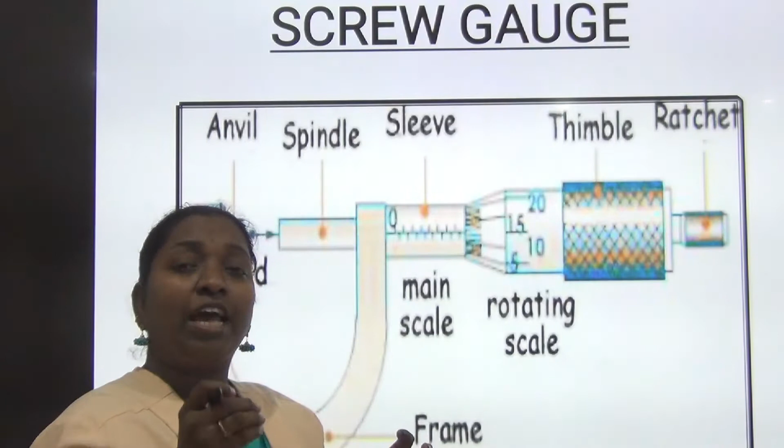In continuation of this, we are going to learn the next topic: the screw gauge. This is an instrument used to measure small dimensions. Like last class we learned about the vernier caliper, using which we can measure the length of an object up to 0.1 millimeter or 0.01 centimeter. The same way, this screw gauge is also a small instrument which we use to measure a dimension of any object, especially the diameter of a thin wire or the thickness of a thin plate.

You know what a thin wire means. In a cable wire, after removing the insulated part, you can see the metal wire. That metal wire's diameter is easy to find and measure with the help of this screw gauge.

So let me read the content along with you. I'd like to describe what this screw gauge is. I told you it is used to measure the diameter of a thin wire or the thickness of a thin plate. So how is it described? Description of screw gauge: the screw gauge consists of a U-shaped metallic frame.

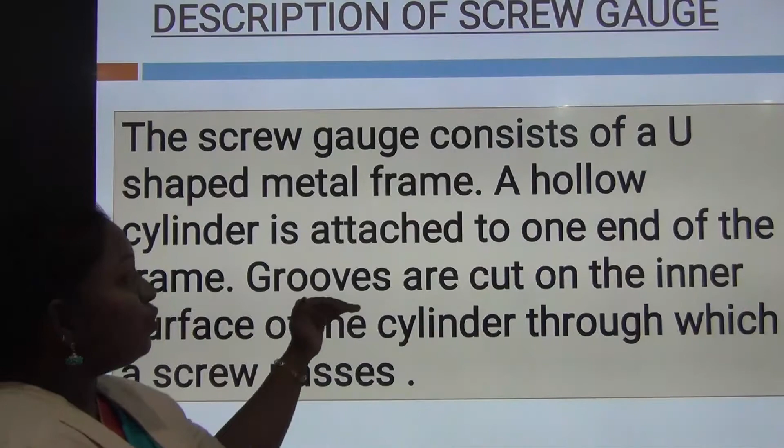A hollow cylinder is attached to one end of the frame. Grooves are cut on the inner surface of the cylinder through which a screw passes. So with this note, let me explain with the picture. First I'll explain with the picture, then we'll read the content, children.

So what letter can you see here? It's representing the letter U, isn't it? U, made with metal, so it is called U-shaped. The metal U-shaped metallic frame.

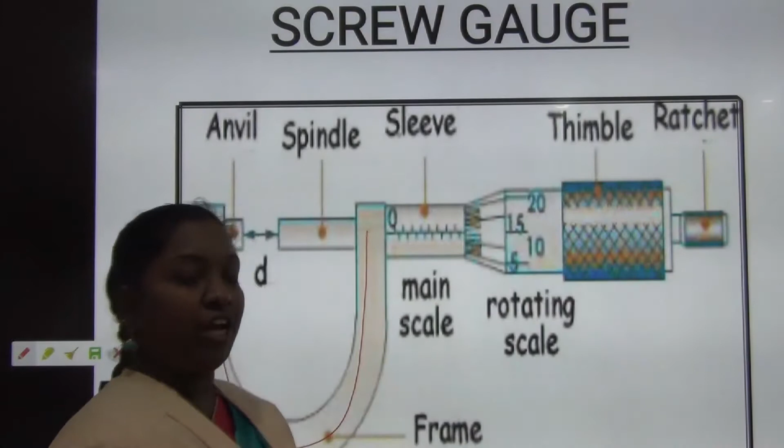See these two frames. Inside, a groove is cut through which a screw passes. Along with that you can see the sleeve, it's a barrel, fixed along with the screw. This sleeve contains a graduation on it, some scale is present on this. This is called the pitch scale.

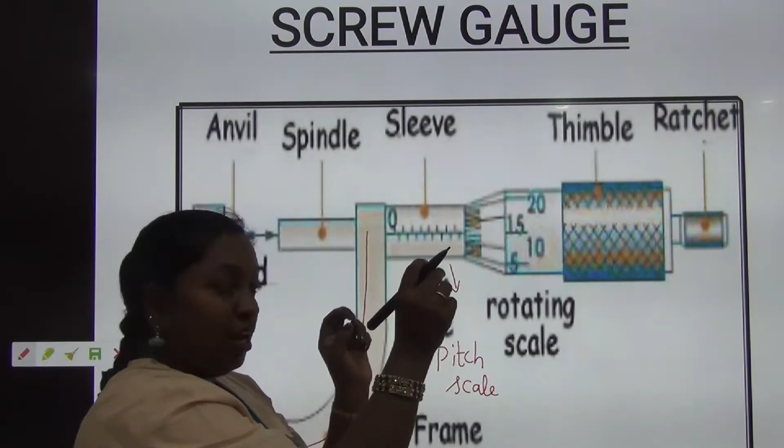Listen children, U-shaped metallic frame, on both sides. On one side, inside the groove is cut so that if you want to insert a screw, a hole is made through that, and the screw passes through. The same way, a hole is cut and a screw passed inside it. Along with that, a sleeve is fixed on it. The sleeve has a scale of graduation. That scale is called the pitch scale. It's okay, the scale is represented in millimeter form.

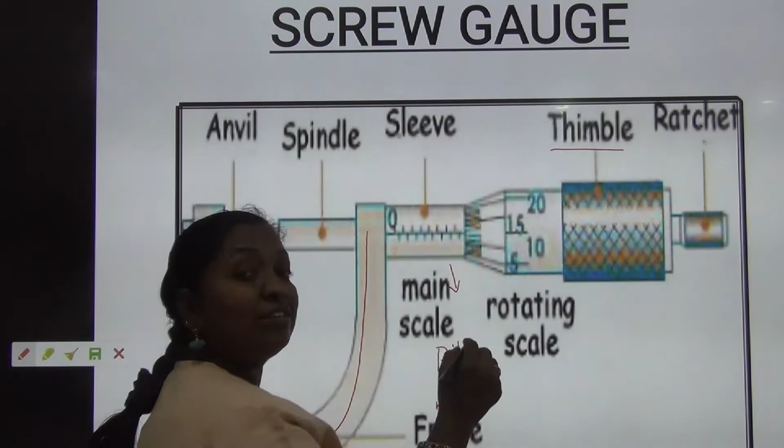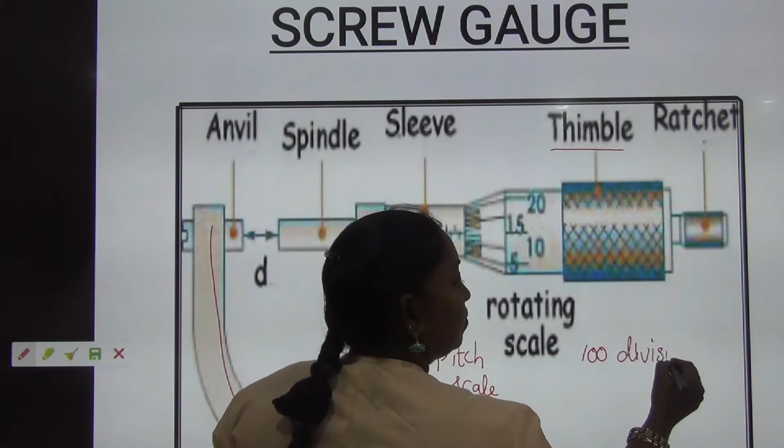This sleeve, one end of it is attached to the hollow cylinder, which is called the thimble. This thimble also contains graduations, but not in millimeter or centimeter. It contains a graduation of 100 divisions, present on this hollow cylinder. So this scale is called the head scale.

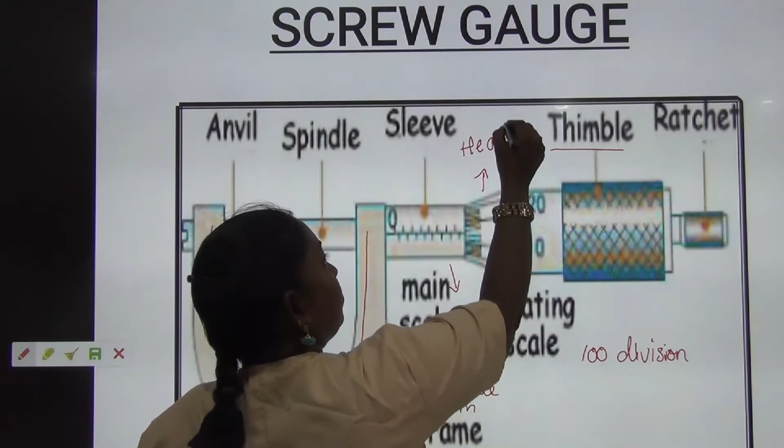Understood children? Pitch scale, head scale. See, most important in this device: it can be rotated with the help of this ratchet. This ratchet is used in the screw gauge. Why? Because it is called a safety device. Why is it a safety device? It is called a safety device.

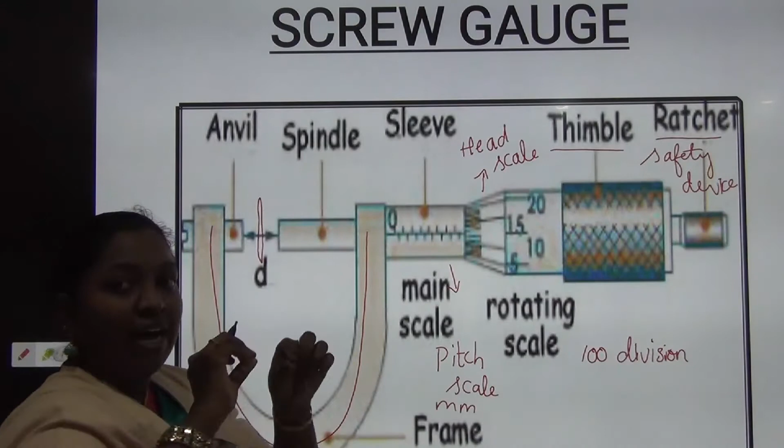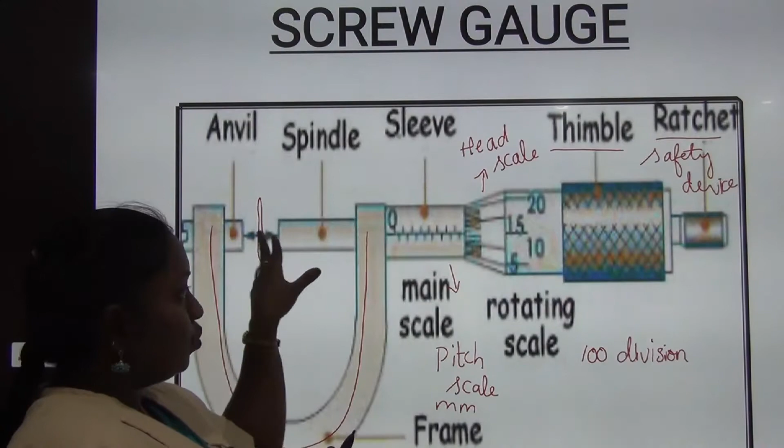After seeing the object which we are going to measure, we keep it between these two studs, in this gap. So if I keep the object there, until the thickness is reached you can rotate with the help of the screw. When you keep rotating and the object gets in contact between the screws, you should stop rotating once it gives a sound, a tick. At that moment you stop rotating, because if you continue to screw the device after the object is in contact, it will give too much pressure and we will get an error in the value when we scrutinize it. That's why this is called the safety device.

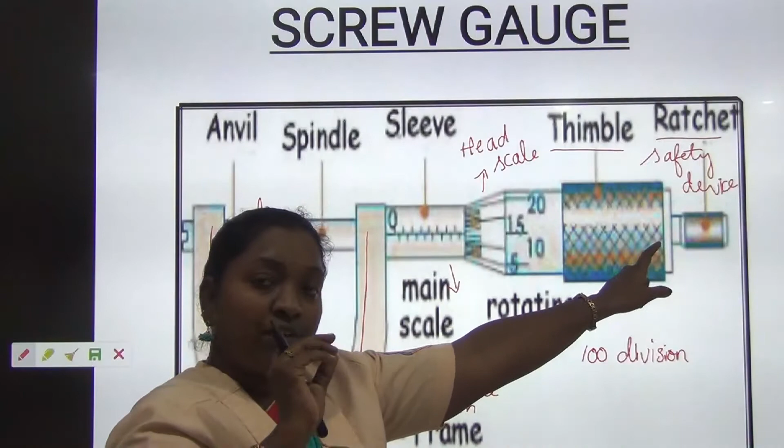This device, when I give a sound, stop, should not give much pressure to the object, otherwise it will give a value in error. That is why this ratchet is called the safety device.

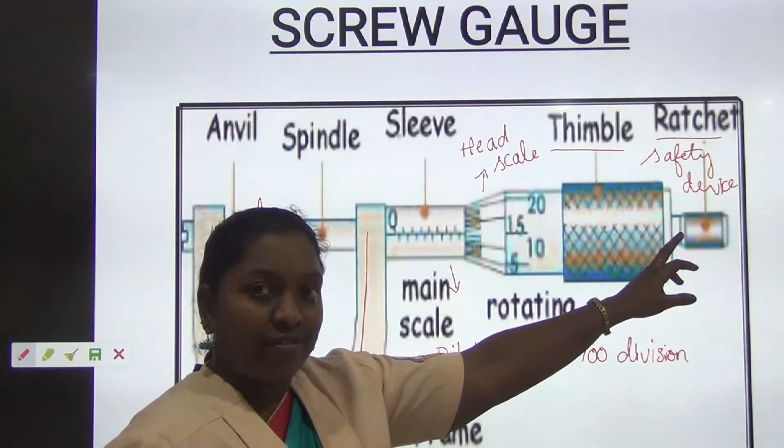Let me explain the description part one more time. This is a U-shaped metallic frame, and on both sides there are screws and places for them. One side is cut, and through that a screw is passed.

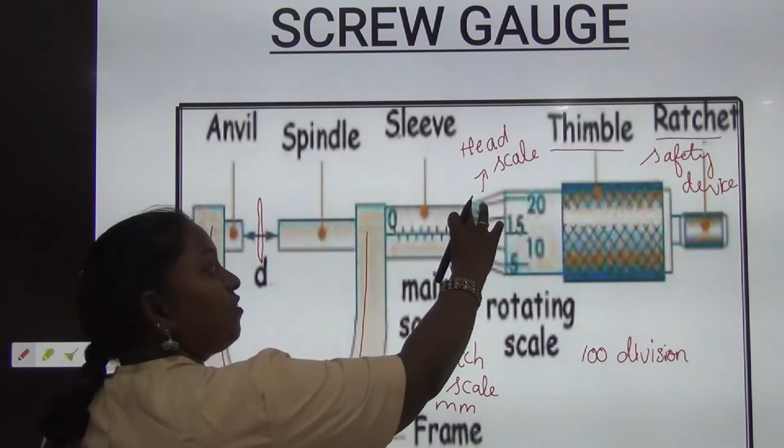Along with the screw, there is a pitch scale, and one end of the pitch scale is attached with the head scale. The pitch scale contains graduations in millimeters. The head scale contains graduations in divisions. How many divisions does the head scale have? 100 divisions.

This is called the safety device - the ratchet. Why is it called a safety device? It will avoid exerting pressure; it will stop giving too much pressure on the object. That is why this ratchet is called the safety device.

This is how the screw gauge is fixed. See this anvil and spindle. The anvil is not a movable part; it is fixed along with one end of the frame.

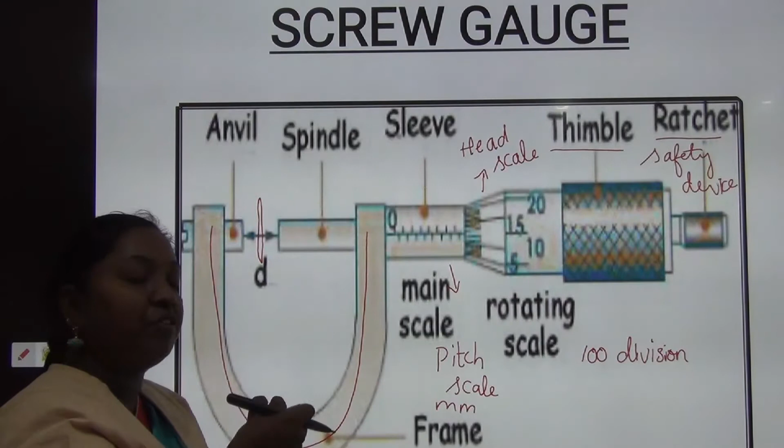The spindle is fixed at the opposite place. It is called the spindle, and it is the movable part. It depends on the thickness or diameter of the object - we can move and rotate it. By rotating it, it will make contact between the two screws. Understood, children?

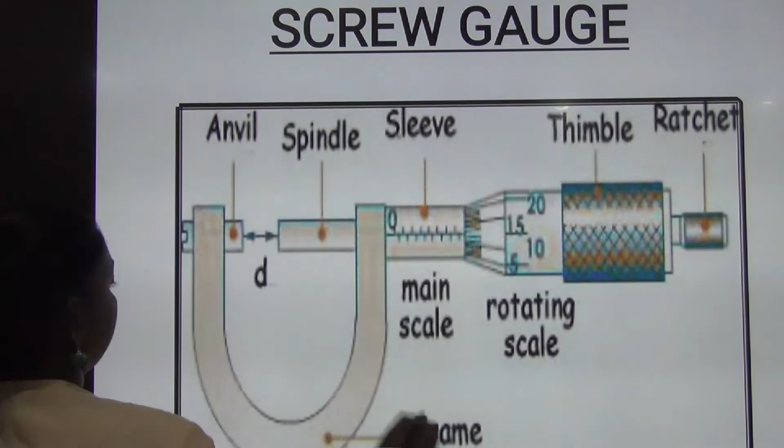So which I have explained is given as content. Let me read now: on the cylinder, parallel to the axis of the screw, there is a scale which is graduated in millimeters, called the pitch scale.

I told you, along with the screw, a sleeve is fixed. On the sleeve, what is present? A scale graduated in millimeters. That millimeter scale is called the pitch scale.

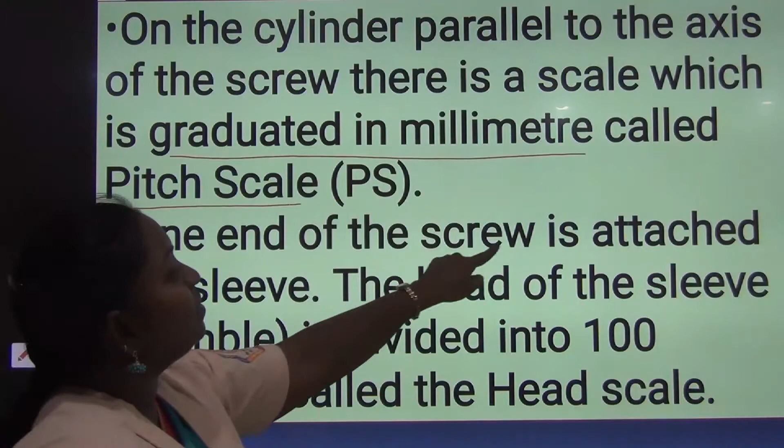Now, one end of the screw is attached to a sleeve. The head of the sleeve is the thimble. I told you about the head scale division - it is called the thimble, and it is divided into 100 divisions.

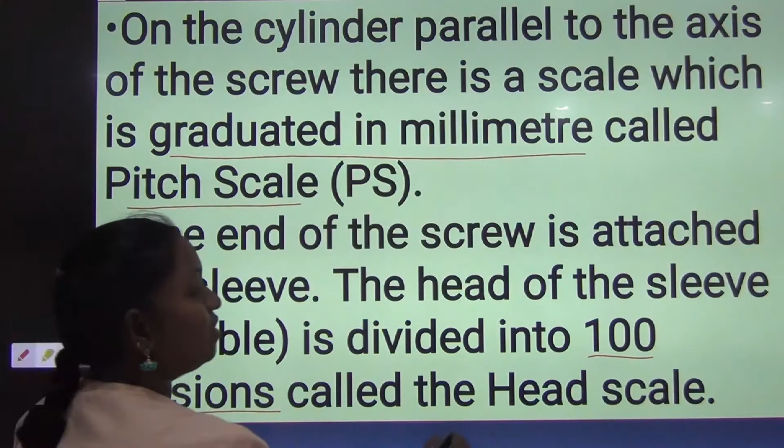100 divisions - the pitch scale in millimeters, and this is the head scale in divisions. So these 100 divisions of the scale are called the head scale. So through the screw gauge we can measure values: pitch scale in millimeters, head scale in divisions.

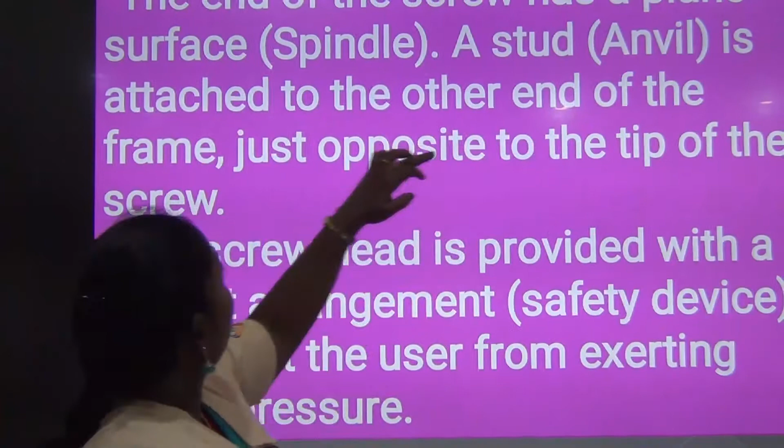The end of the screw has a plane surface called the spindle. A stud (anvil) is attached to the other end of the frame, just opposite the tip of the screw. So on both sides, one is a movable part and one is an immovable part - that is called the spindle and anvil.

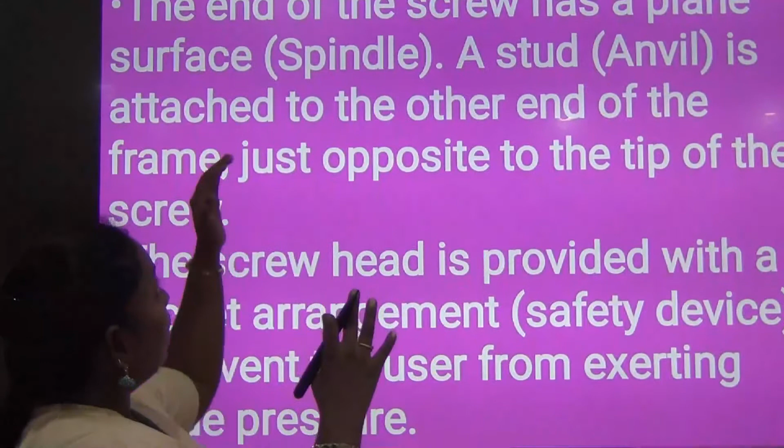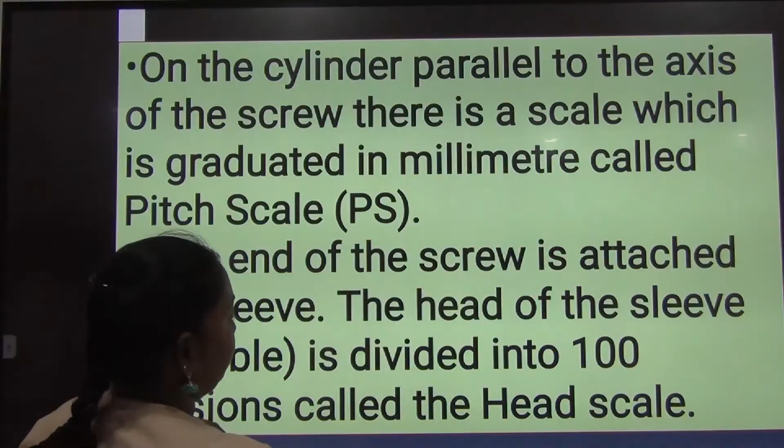The screw head is provided with a ratchet. Let me explain how the ratchet is used - that ratchet is called the safety device. It's used to prevent the user from exerting undue pressure on the object. So to stop giving pressure, to stop rotating it, this ratchet is used. That is why the ratchet is called the safety device.

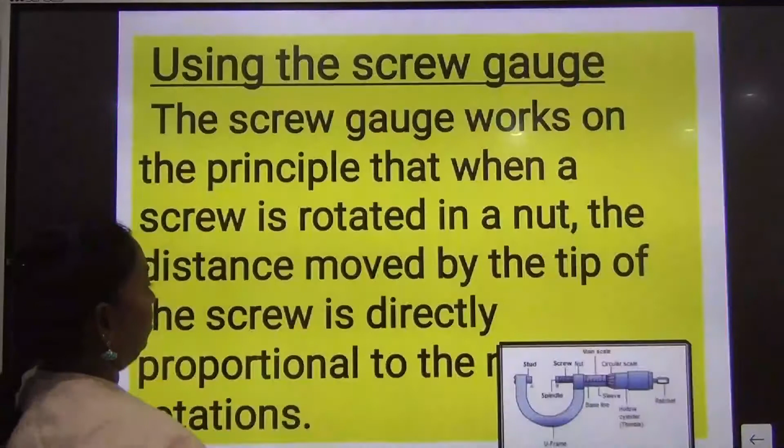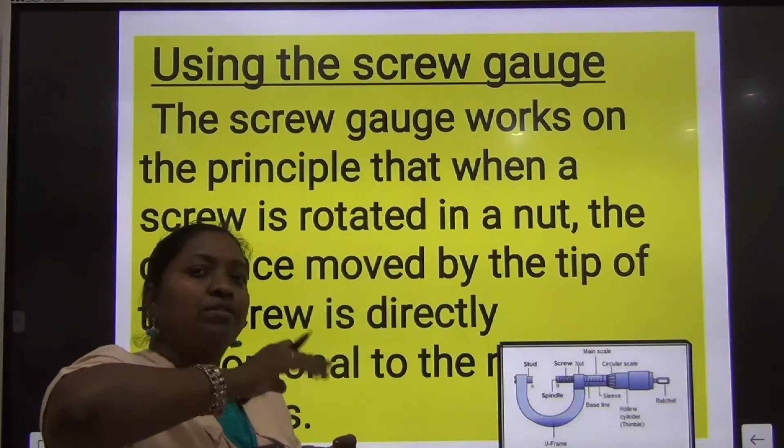Now you know the description of the screw gauge. How does it work? You know how a screw is rotated in a nut - you rotate the screw in the nut and it keeps moving.

The same principle applies in the screw gauge also. Depending on the diameter of the object, using the ratchet, the rotation will take place. That principle is applied here: the screw gauge works on the principle that when a screw is rotated in a nut, the distance moved by the tip of the screw is directly proportional to the rotations.

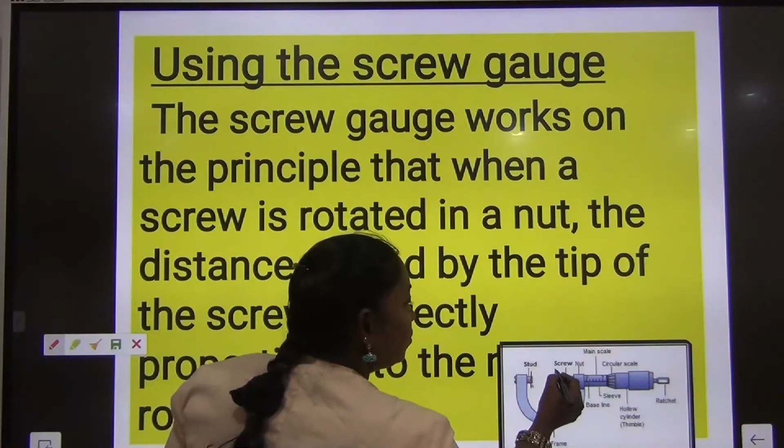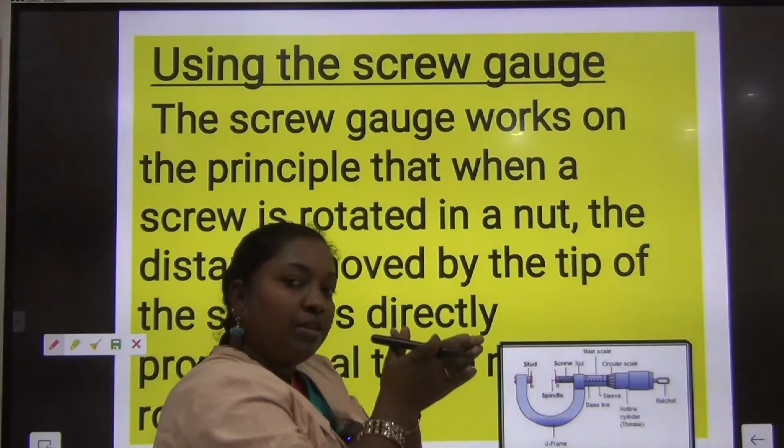So you will rotate it until these two screws get into contact. It will keep rotating the head scale division until contact is made, and rotation takes place. That is why it works on the principle of a screw in a nut - the same principle applies in the screw gauge.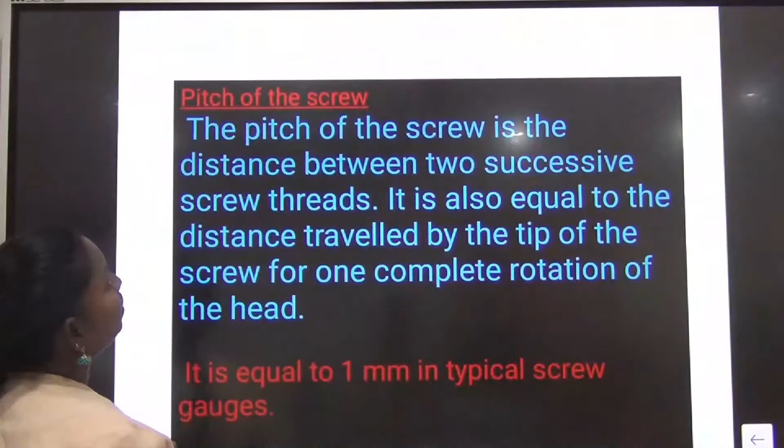So how to find the pitch of a screw? The pitch of the screw is the distance between two successive screw threads. Two threads are present in the U-shaped frame. It is also equal to the distance travelled by the tip of the screw for one complete rotation.

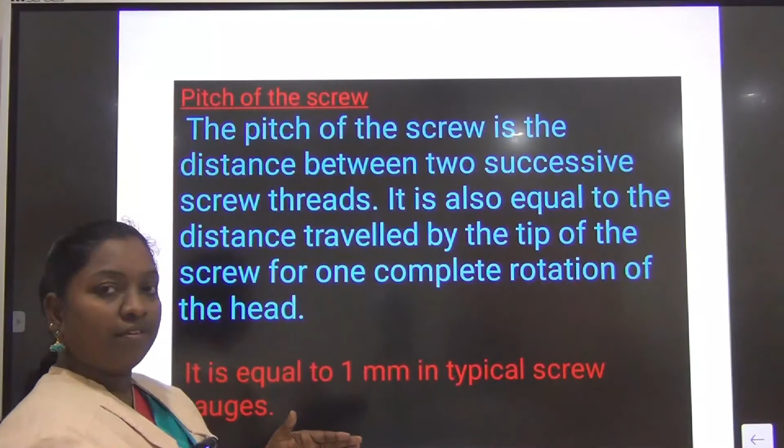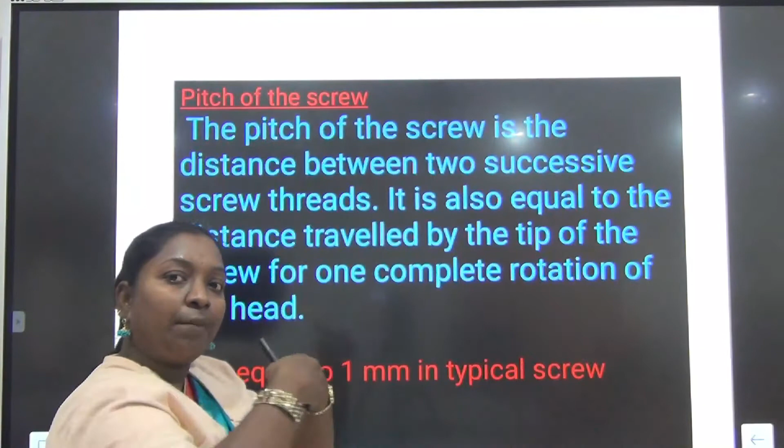So you know what is pitch scale. If this is a pitch scale, by using the head scale, after it rotates, how do we measure it more? One complete rotation of head scale covers 1 millimeter of the pitch scale. So if this is my pitch scale: 1, 2, 3, 4, 5. So what will happen? Again 1, 2, 3, 4, 5. So after rotating, the head scale covers a 5 millimeter distance on the pitch scale. How many rotations? 5 rotations.

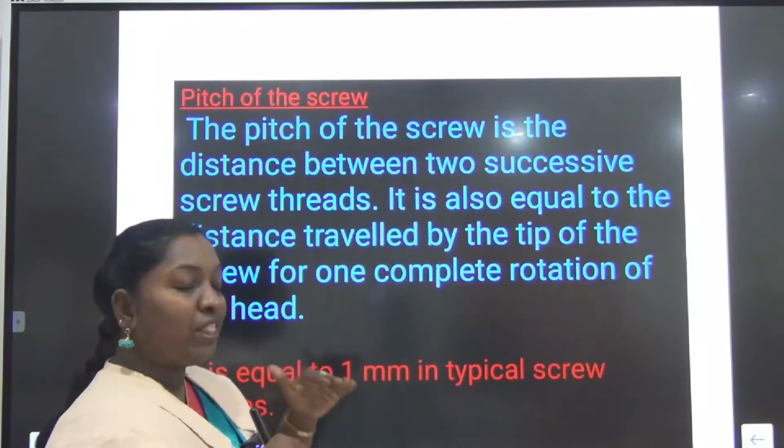See that, so with that you can find the pitch of a screw. How to find it: distance covered on the pitch scale divided by number of rotations. With that we can find the pitch of the screw.

Then, the least count of a screw gauge. Even the vernier caliper is used to find least count. Least count means the smallest value. So how to find it in the screw gauge? The distance moved by the tip of the screw for a rotation of one division of the head scale is called the least count of the screw gauge.

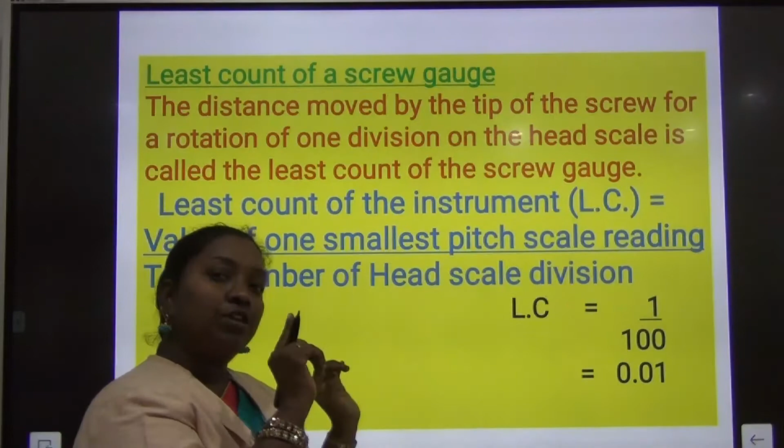The least count of the instrument is the value of one smallest pitch scale reading. Even a normal scale has graduations from 0 to 15 centimeters, and the smallest one is 1 centimeter. The same way, here the pitch scale contains graduations in millimeters, so the smallest division is 1 millimeter. What is the total number of divisions in the head scale? 100.

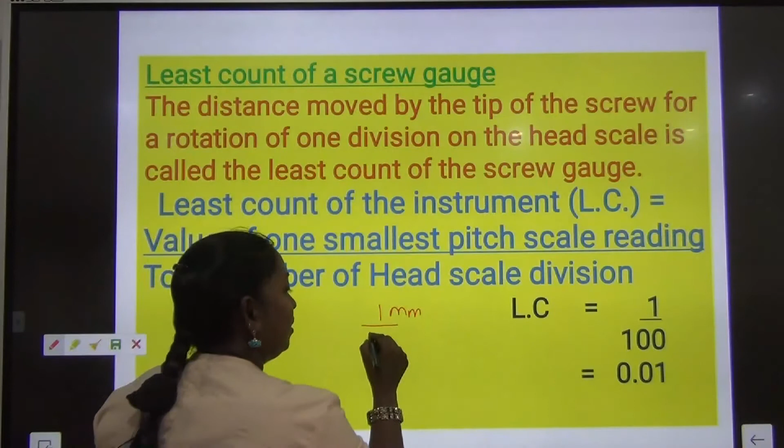So that 1 millimeter, the least value in the pitch scale, is 1 millimeter. Number of rotations of head scale: how many divisions are present in the head scale? 100. So if you divide it, what will you get? 0.01 millimeter. This is the least count value of the screw gauge.

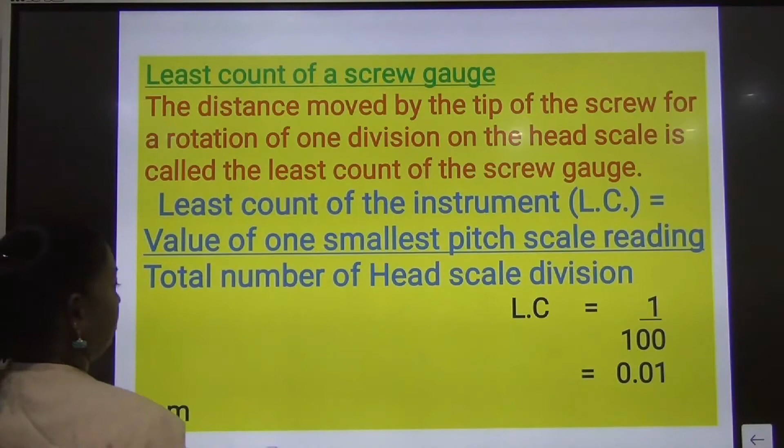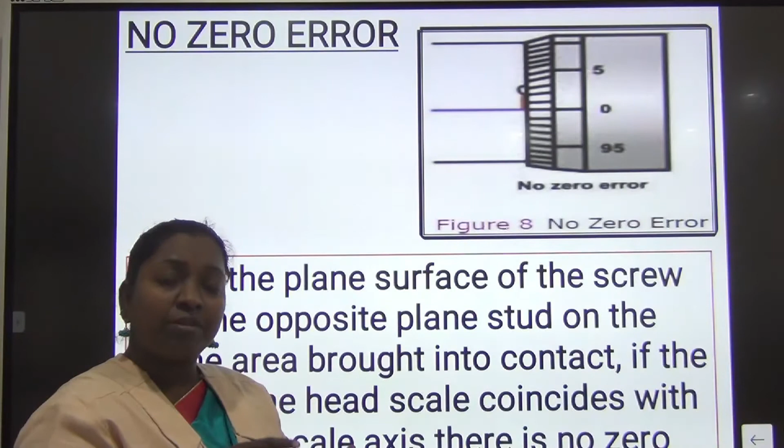This is how the descriptions work, the principle it is based on, and how to find the least count, everything we learned. Now, before using it, the most important thing is we have to check whether the instrument is free of error or has an error, and how to correct that. Shall we see that? Now the first topic is zero error, so you should first check the preliminary adjustment of the screw gauge, whether it has zero error or not. So how do we find it if the instrument has no error?

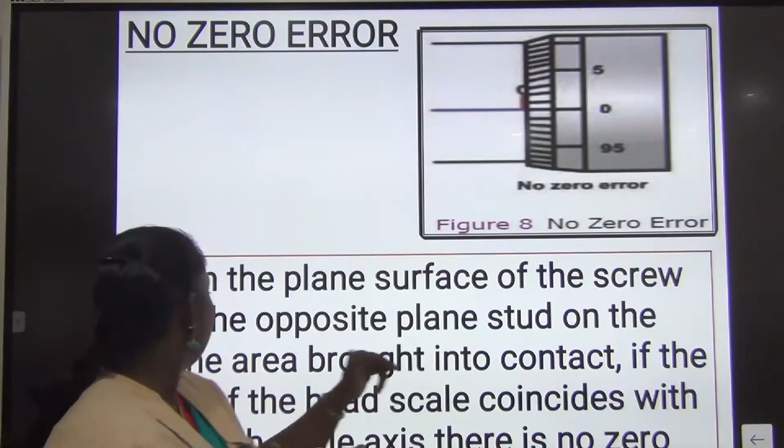When the plane surface of the screw and the opposite plane stud on the frame are brought into contact - the two studs are present in the U-shaped frame - when you keep them in contact, if the zero of the head scale coincides with the pitch scale axis, there is no zero error. So look at the picture now.

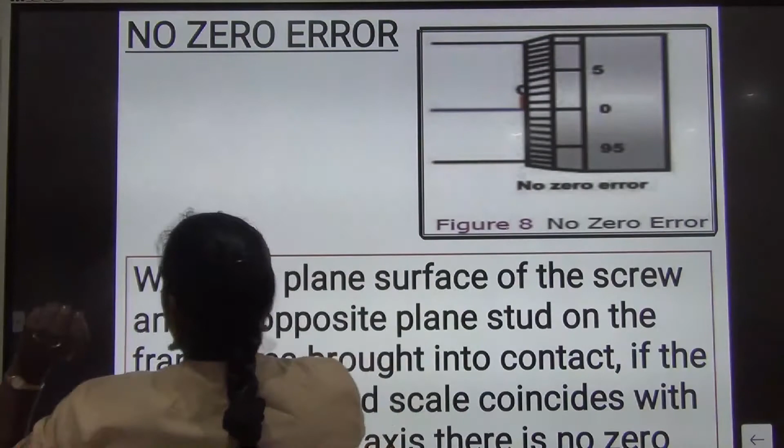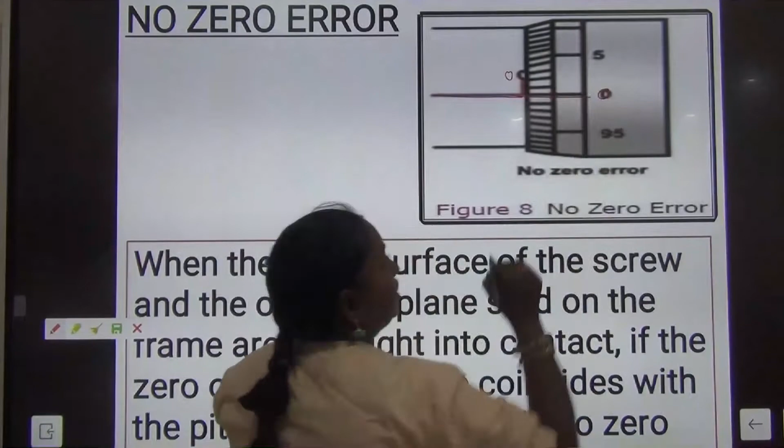So this is the pitch scale 0, and see this head scale division. This is head scale 0. Both the zeros are coinciding with each other. See, the 0 of the pitch scale and the 0 of the head scale are lying like a straight line. If it is lying in a straight line, you can consider there is no error.

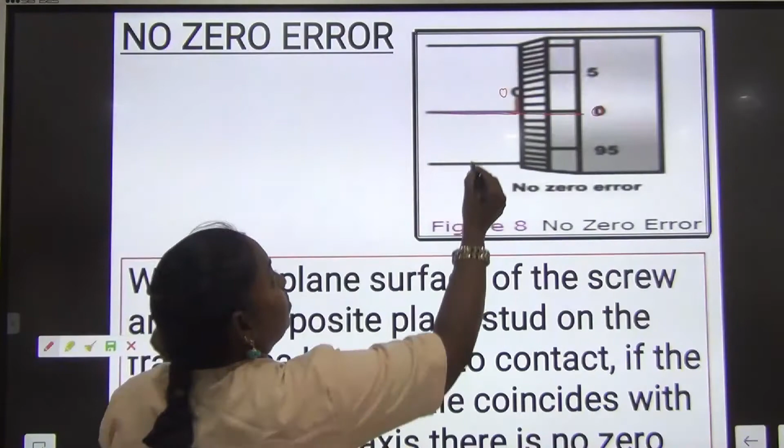So how to find the error? The 0 of the pitch scale and the 0 of the head scale - both the zeros, see, this is the 0 of the pitch scale, this is the 0 of the head scale. Both are lying like a straight line. So you can confirm that there is no error in the instrument.

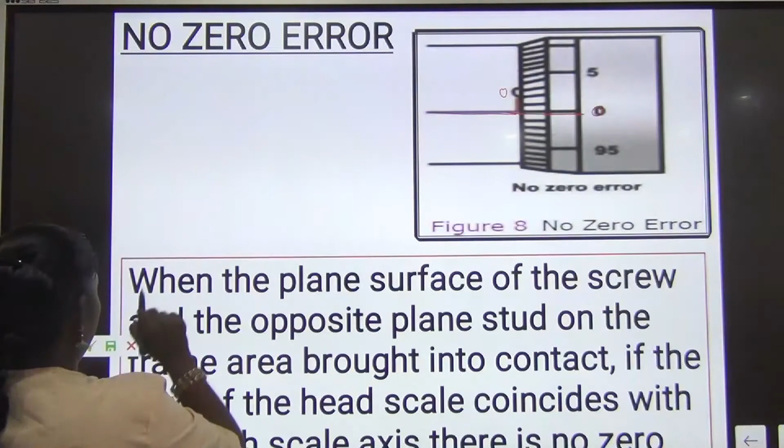Okay, next is the positive error. First let me explain you with a picture, then we'll see this.

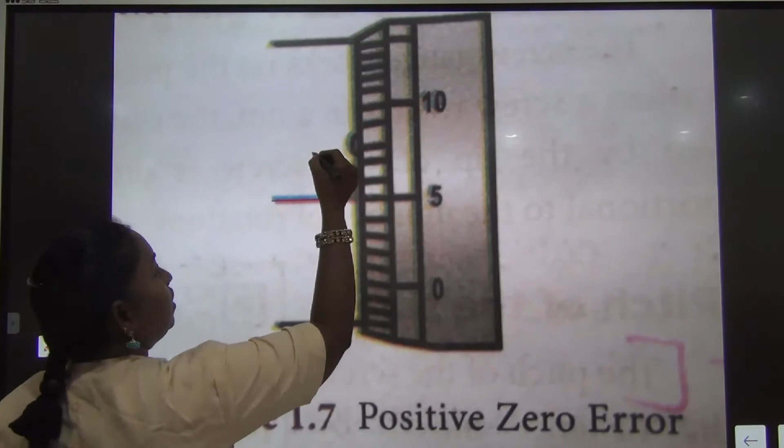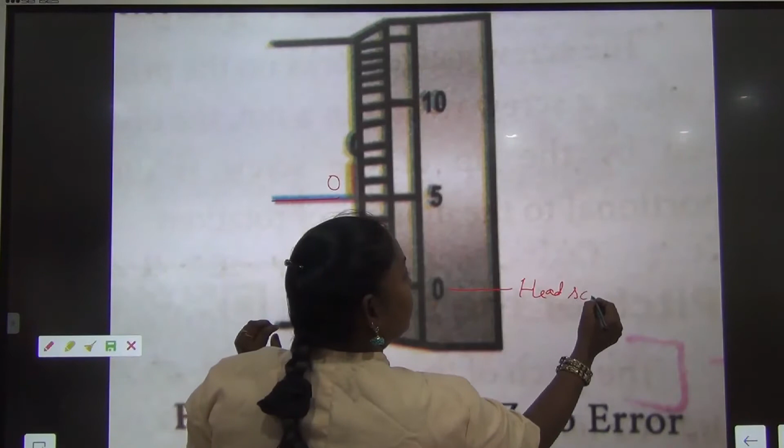See, how to find the positive error? This is 0 of the pitch scale, and then this is 0 of the head scale. Can you see the difference? The 0 of the pitch scale is lying above, and the 0 of the head scale is lying below. So when the 0 of the head scale lies below the 0 of the pitch scale, you can say that it is a positive zero error.

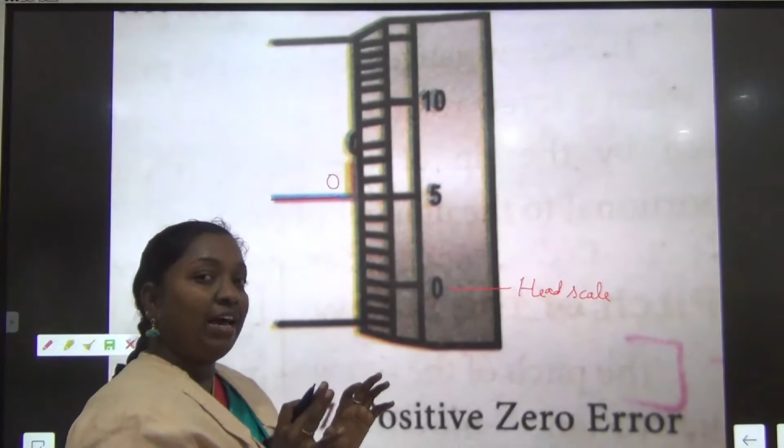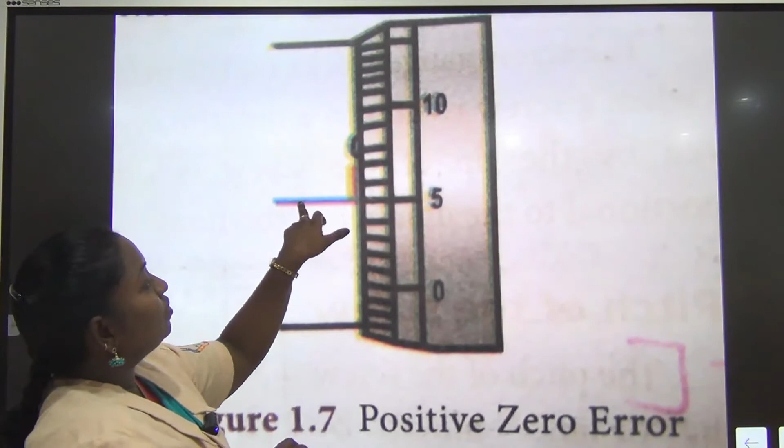Understood? Lying below the 0 of the pitch scale means you can consider this an error. So how is the error there - how do you say positive or negative? When it's lying below, you can say it is positive. So just make a note of it. Along with the 0 of the pitch scale, which number is coinciding over here? The head scale is coinciding with number 5.

See, let me read it. When the plane surface of the screw and the opposite plane stud on the frame are brought into contact, if the 0 of the head scale lies below the pitch scale axis, shown as 0 of the head scale lies below the pitch scale, then you can say there is 0 error.

0 error is positive. For example, now the fifth division of the head scale coincides with the pitch scale, so the 0 error is positive. How to find the 0 error? We have to find how many divisions, the number for which error is positive.

So this is the formula for finding a positive error. 0 error equal to plus n into LC. We found n is what?

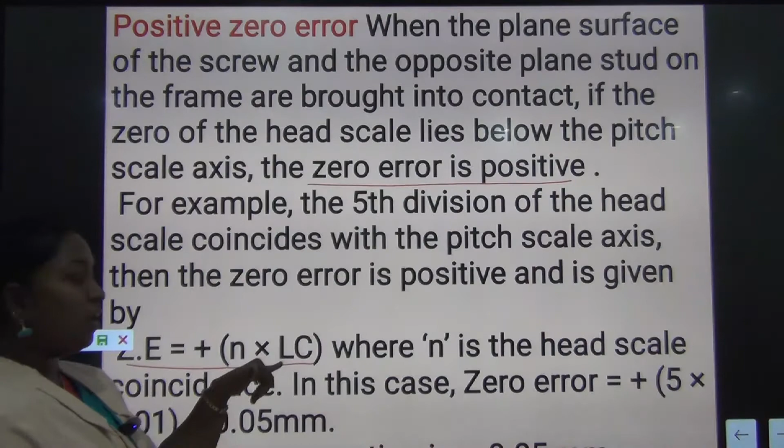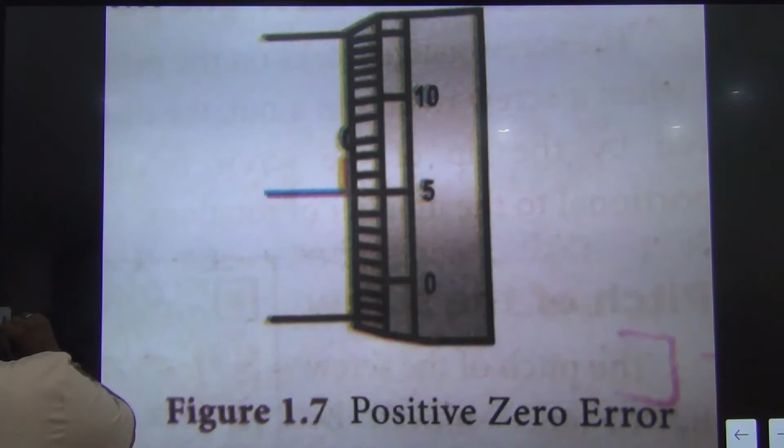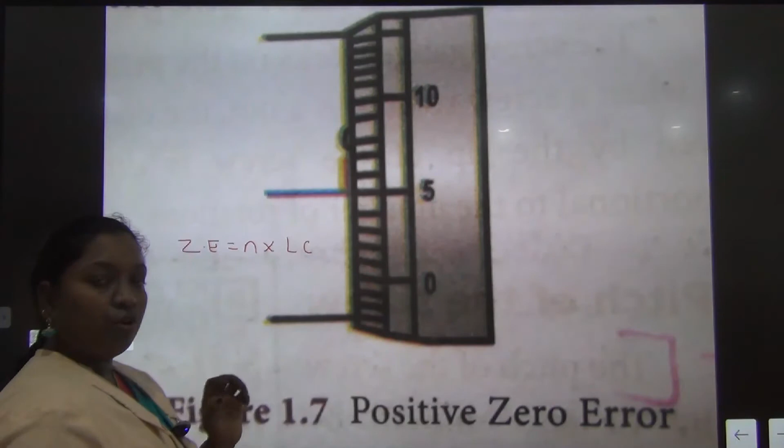What is the formula? To find the 0 error, 0 error equal to n into LC. If both the things are lying in a straight line, there is no error. If 0 of the head scale lies below the 0 of the pitch scale, you can consider it positive.

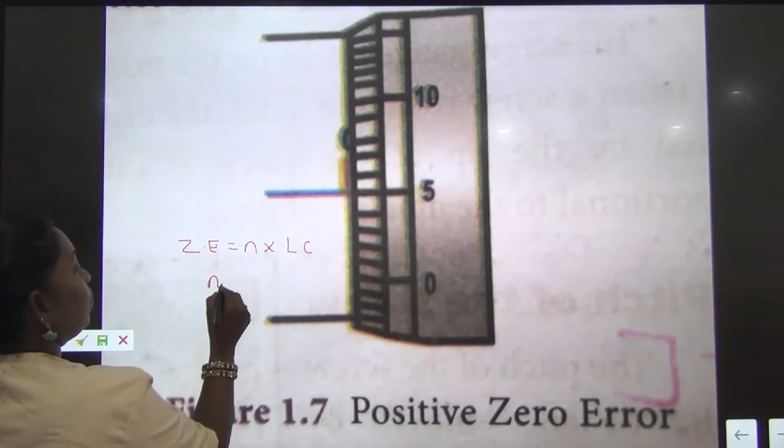So n is the number of head scale divisions coinciding with the pitch scale. What is the number coinciding now? 5. So n equal to 5.

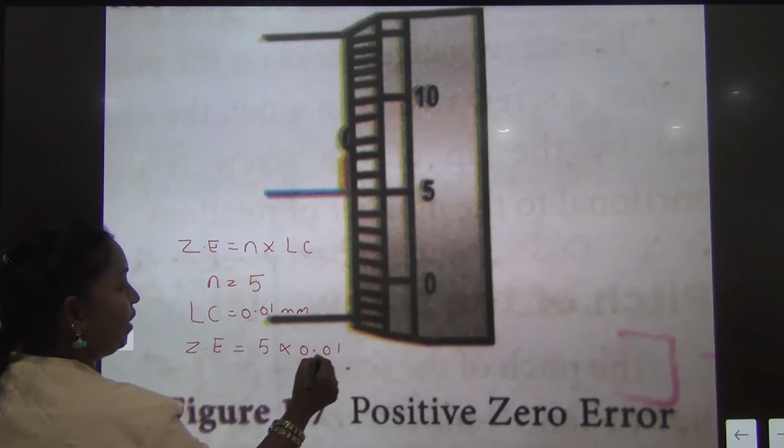What is the least count value? Least count equal to 0.01 millimeter, isn't it? So if we apply it in the formula, 0 error equal to 5 into 0.01, which means it is a positive error, no? So 0 error is...

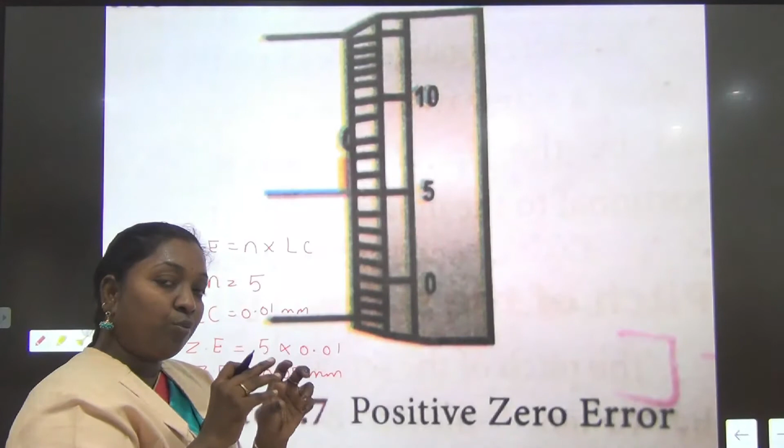0.05 millimeter. 0 error is positive. So positive correction is, what is the error? Even in your clock, if 5 minutes is adjustable, you will adjust and keep it 5 minutes earlier, or if it is going slow by 5 minutes, you will adjust by adding 5 minutes extra.

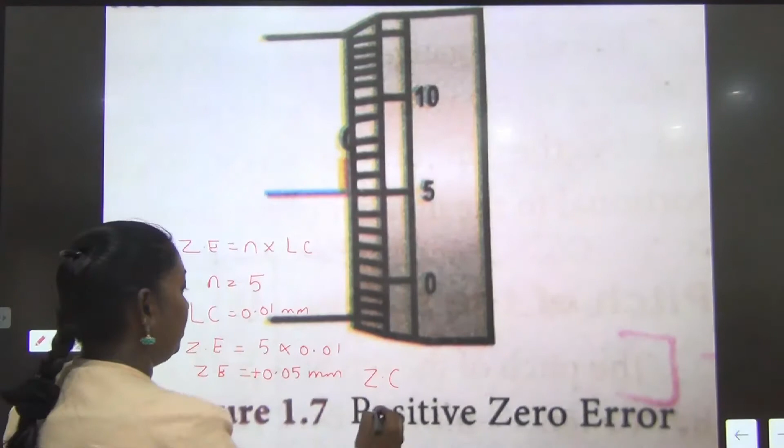So depending on how much error there is, you will add it accordingly. So when the error is positive, what is the correction? Zero correction, ZC, is minus 0.05 millimeter. Understood, children, how to find? This is the formula to find the 0 error when it is positive.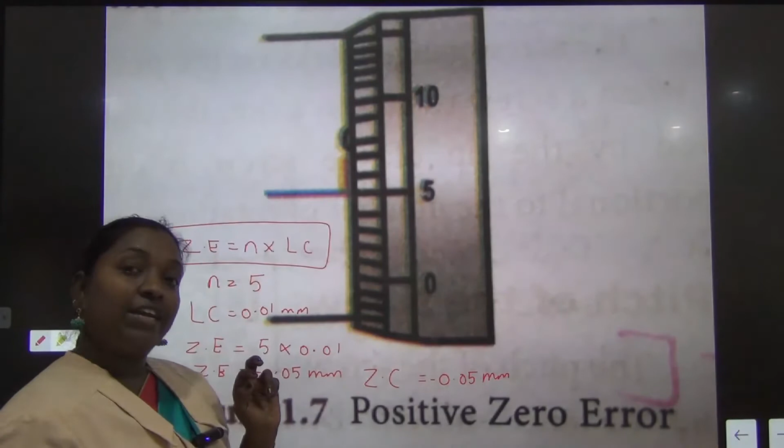Okay, then we'll see what is the negative 0 error. It's the same thing, what is the difference? When you bring both the screw contacts together, when the head scale 0 lies above the pitch scale, you can consider the error as negative.

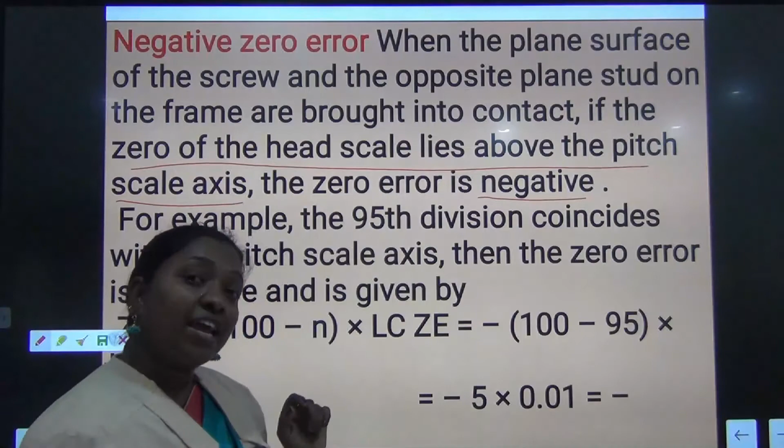Both lying together means no error. Lying below means positive. Lying above, 0 lying above, means you can say it is negative. To find the 0 error in this negative case, this is the formula.

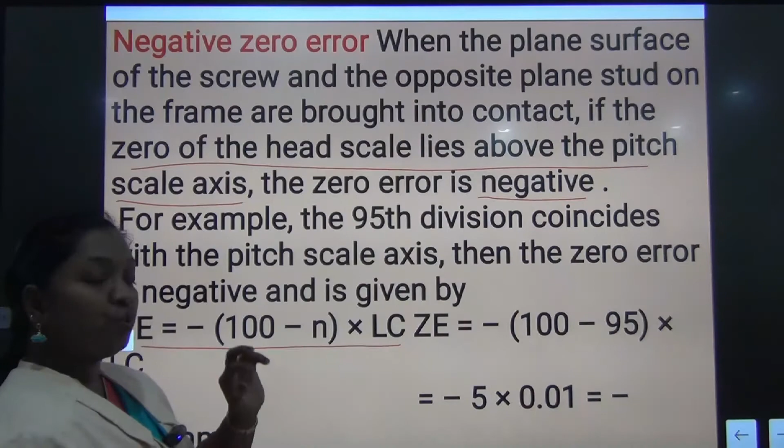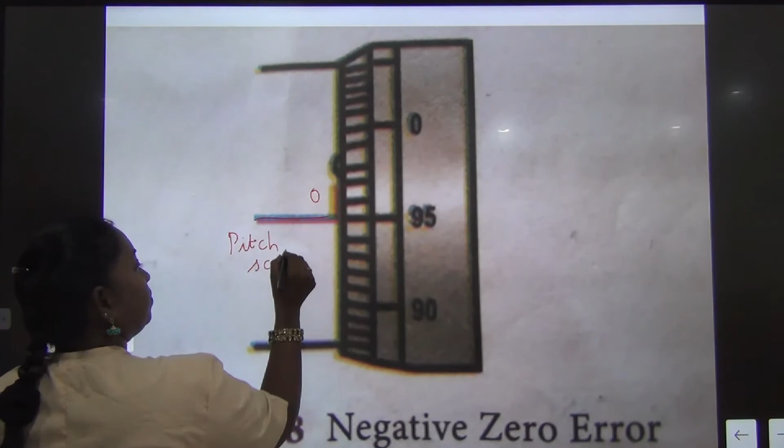0 error equal to minus, 100 minus n, into LC. So with the picture I will show you. This is the picture of negative 0 error. See, this is the 0 of the pitch scale. So now the head scale 0 is above.

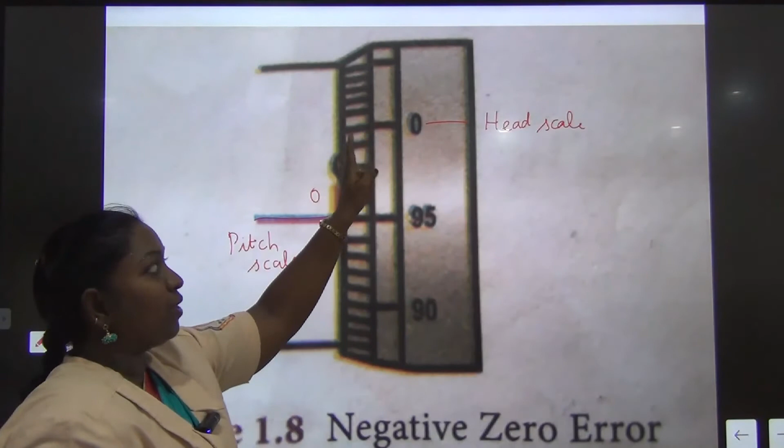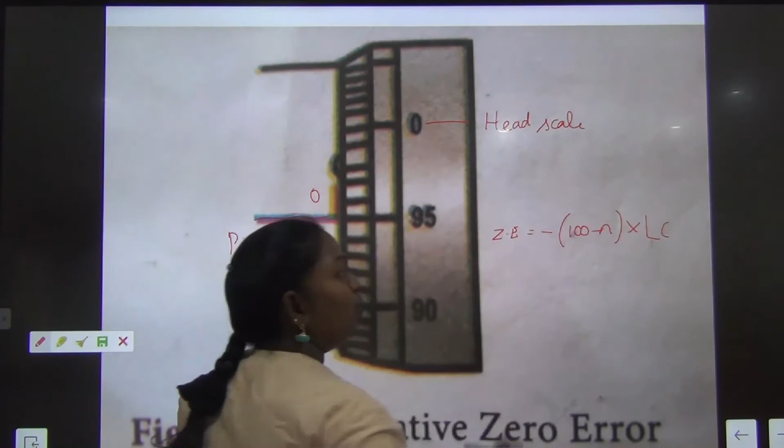So when it is lying above the 0 of the pitch scale, you can consider it a negative 0 error. So now the formula to find a negative 0 error is: 0 error equal to minus, 100 minus n, into LC. Okay, minus symbol is constant, 100 is constant, n is the number of divisions on the head scale.

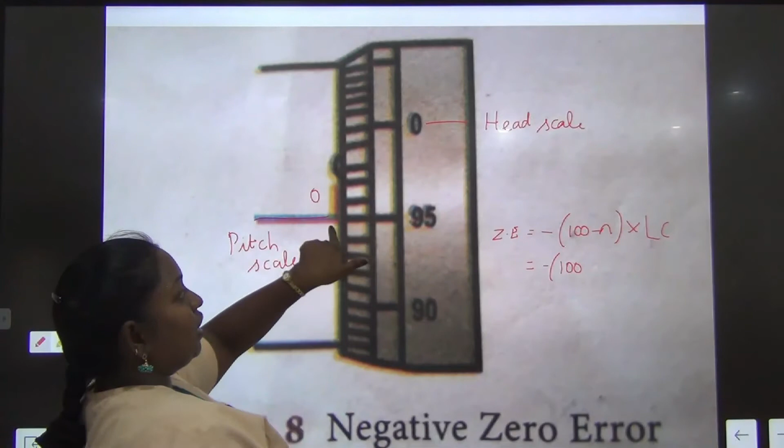What is the number lying now? 95. So minus... 95. What is the least count value? 0.01. So minus, 100 minus 95...

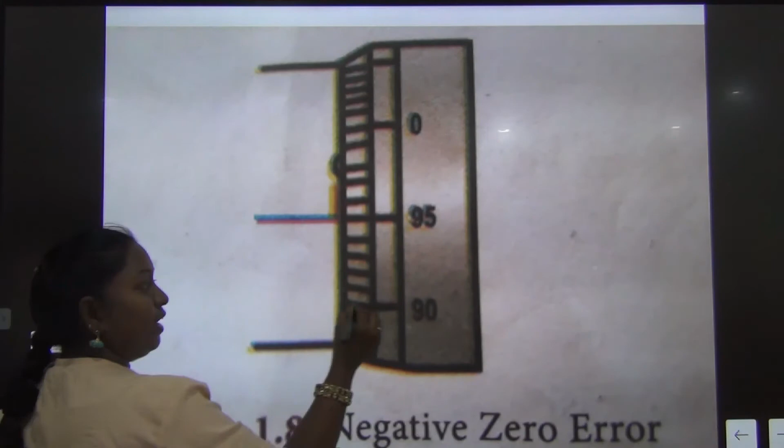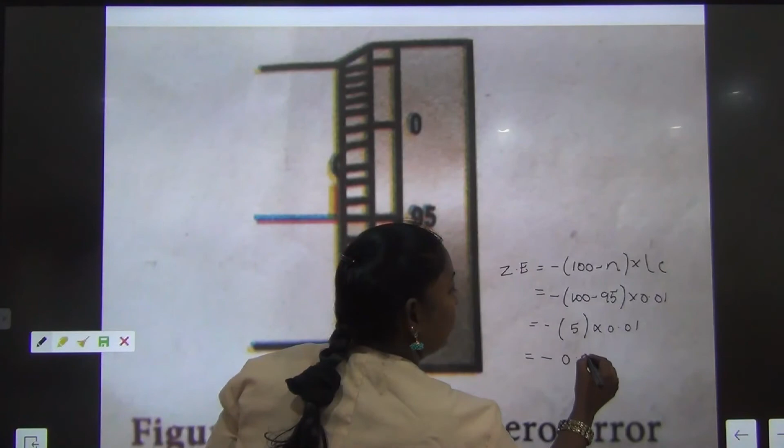Let me write again. This is how we have to write it. Okay, next, 100 minus 95 is 5. So what is the value? Minus 0.05 millimeter. This is the negative 0 error.

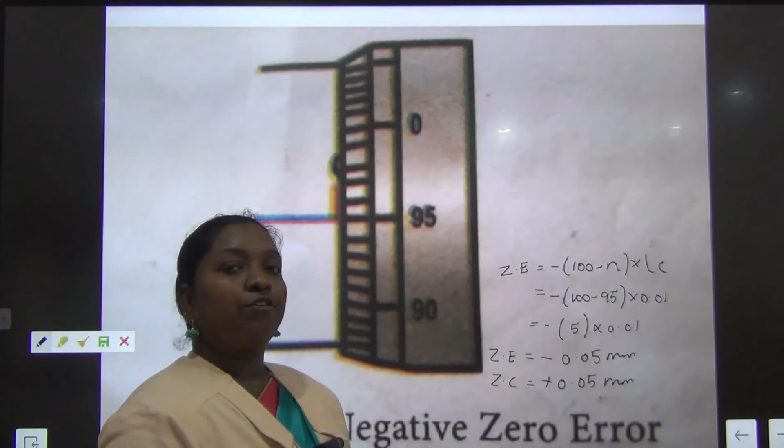So when the error is negative, you should use this formula. So what is the correction? Plus 0.05 millimeter. Okay, this is how we have to find the error by using the formula.

When there is no error, no problem. When there is an error, you have to find whether 0 is lying above or below. Above means negative 0 error, below means positive 0 error, and you should remember the formula. With this you can find the error. Depending on the error, the correction will take place. I hope this topic is now very easy to understand.